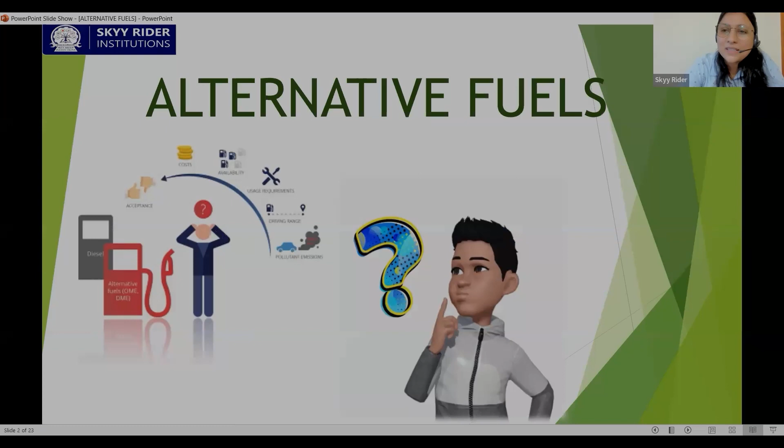So before moving forward, let's first know what are alternative fuels. So alternative fuel is, whatever fossil fuels we have, those are the conventional fuels which have been in the market for hundreds of years, and we are extracting them from refineries, from oil wells, from the seabed.

But nowadays we want something else, and this something else is alternative fuel actually. They are equal in energy density. We can say that they are big competitors of fossil fuels, and the most important thing is that they are never going to vanish away. They are renewable energy resources.

We all know that if we talk about oil reserves, generally the Gulf countries have a monopoly of it. So they are all going to, one day or the other, vanish away or be completely used. So we have to think of something else. We have to think for saving our environment.

We can just go for something which shouldn't be imported from anywhere else. We can extract it from within India, made in India, produce it and have reasonable prices, and give it to our consumers. So we can say it is a non-conventional and advanced fuel, derived from resources other than fossil fuels, from sugar cane, from maize, from barley.

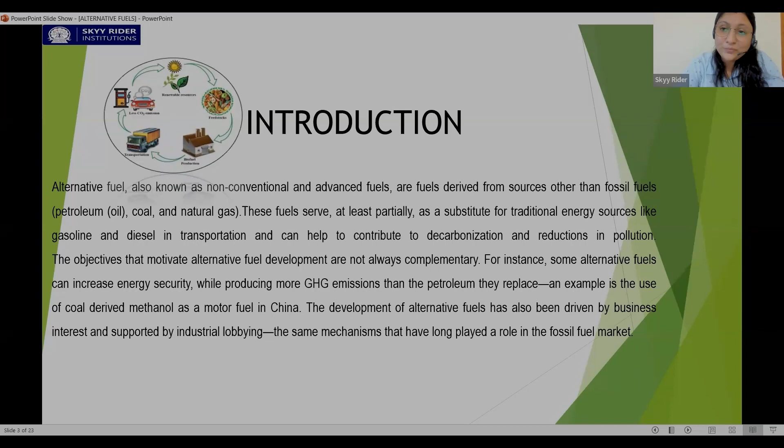So the question arises, as I told you before, is there a need for alternative fuel? Like we are going along fine, everything is going well, we are all living, breathing, and fine. So what is the need?

So the first and most important need is that conventional fuels are very limited. As I said, most of the Gulf countries have a monopoly in that, and the entire globe has to purchase it from them. So a huge amount of our money is going into their hands. We are importing, and the prices rise, and we all have to afford it. We have no other option.

Also, nowadays they are here on this earth and no one knows when they are going to vanish away. So the most important reason why we are turning away from conventional fuel like oil and petroleum is that they'll eventually run out, and they are non-renewable. We all know that. If they are going to just dry up today, we are not going to get it tomorrow, because it took millions of years to be formed.

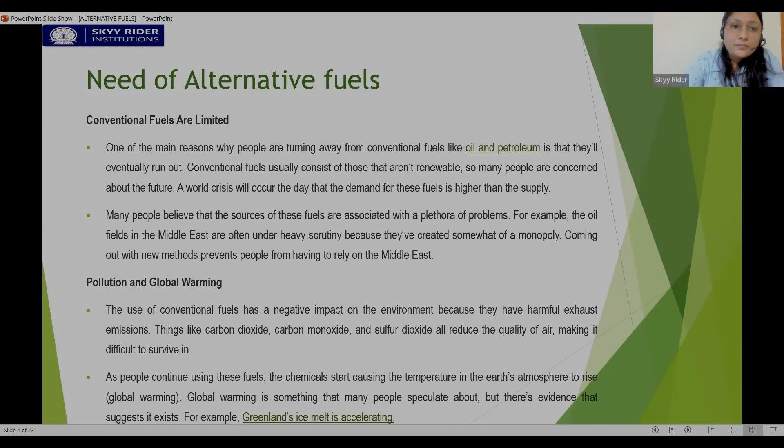So there is a serious need of thinking about alternative fuel. Now the next question is, okay, we know that there is a need, correct? Again, what should be the criteria for having these alternative fuels? So we will have a short discussion on this.

The first one is resource base and energy density, right? So firstly, there should be availability. As we do not have any infrastructure from decades, something like that, we have to build some infrastructure for that. We should have a proper source of raw materials, and a proper factory where we can extract these alternative fuels. So we should have a proper base, and whatever we are extracting from them should also be in competition with those fossil fuels.

If I say that we are getting some amount of energy from gasoline which is more than that of the alternative fuel, then none of the customers are going to opt for alternative fuels, right? Because they want their vehicle to drive at a certain speed, and they should have these kinds of facilities.

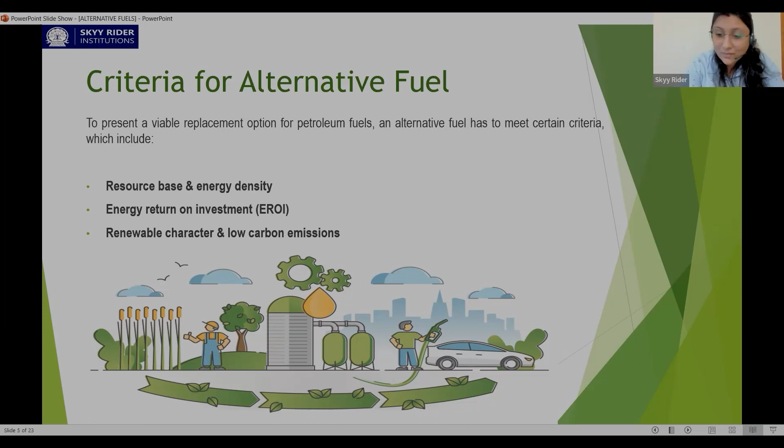So we have talked about the criteria which we have to fulfill before opting for any alternative fuel. We have to think about whether we have a proper amount of arrangement or not. We have to think whether it is economically feasible for us, and we have to think whether it is renewable in character or not. We have to think whether we can get it from waste materials also.

So the next question is, there should be some standard specifications before we opt for the alternative fuel. We have to run our engine, so specifications must be there before opting for anything. We have come from a background where we get lots of energy, where we can drive very effortlessly, and we never give it a second thought, right? So we have to set some standard specifications before opting for anything like that. Before opting for any alternative fuel, before giving it to consumers, we have to test it. So the first thing is that the engine performance should not be compromised.

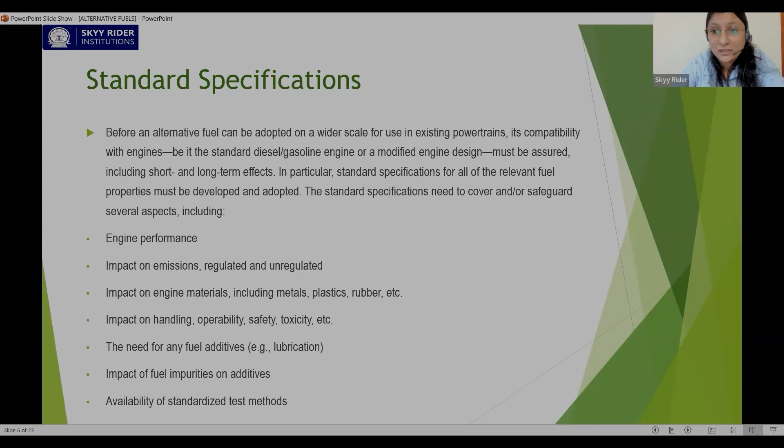So we have learned about that. We have standard specifications and what are the criteria, what is the need, we all know that. Now the next is your types of alternative fuels. As I told you, in this lecture I have taken lots of names in speed. These names are hydrogen, LPG, ethanol, correct? So I'll just explain it one by one.

Okay, so first one is propane. Do we just wait for a second? Okay.

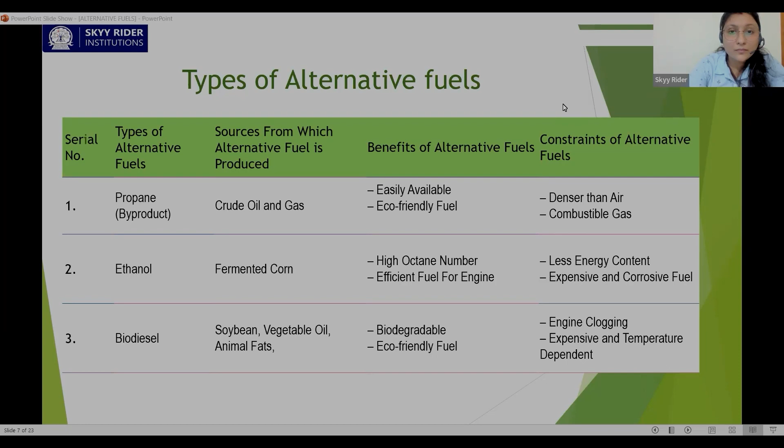Next is electric batteries. We all are living in the era where EVs are very famous these days. We have an electrolyte in which the positive and negative electrodes are there, and the reaction takes place, and we get energy - very clean energy, no wastage. We can say there are no hydrocarbons in the environment, so it is very eco-friendly, with easy service available.

We don't have to go for the regular maintenance of cleaning, decarbonization, and polishing. We don't have to check for sticky valves or misfiring taking place. These type of problems don't appear in EVs.

So what is the problem? The disadvantage - we require proper infrastructure first of all. We should have proper charging stations, place to place, just like we have fuel stations these days. From decades we have had a set infrastructure for our conventional fuels, but for alternative fuels we have to establish that, and that is very important. We have to move smoothly in that direction.

Second is shorter range - we have to charge it time to time. Few giant companies have launched vehicles which can go far, but R&D is working on it, and there's a very high hope for coming eras of EVs only.

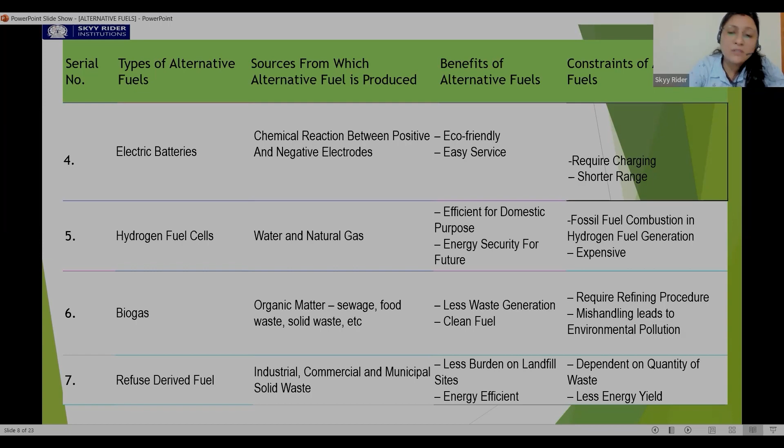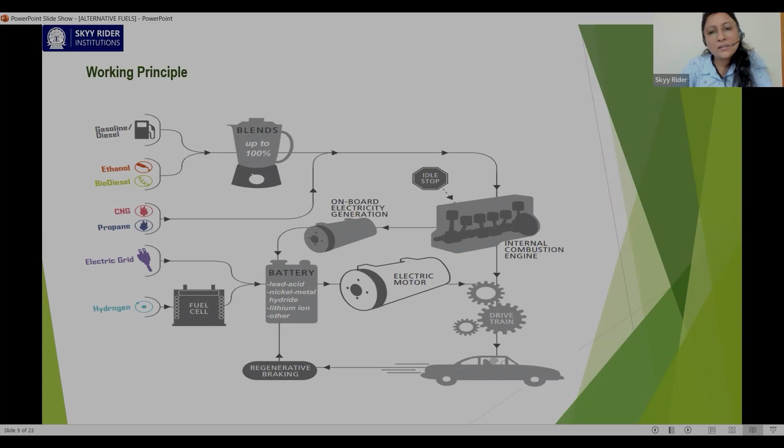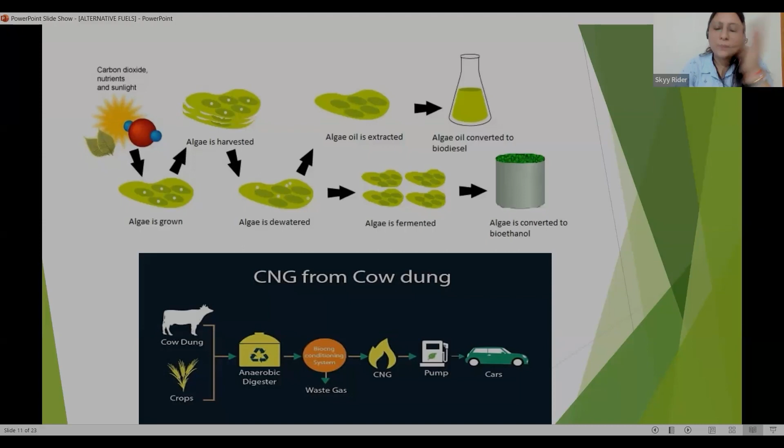So the next question is, why are alternative fuels preferred? We are preferring them because they have less cost.

Generally they cost less than conventional fuels, because we are making it in our own country. We have proper resources for harvesting it and extracting it.

And less waste is produced. Particulate matters are not there, carbon monoxide is not there, unburned hydrocarbons too, it produces less. We cannot say it is not there, but the production is less.

Next thing is that if we have proper alternative fuel plants, then we can generate lots of jobs. There's a survey in USA that after just opting for alternative fuels, they had millions of jobs because of this, because they had set up a factory, they had contacted the farmers and all, and they had a proper setup.

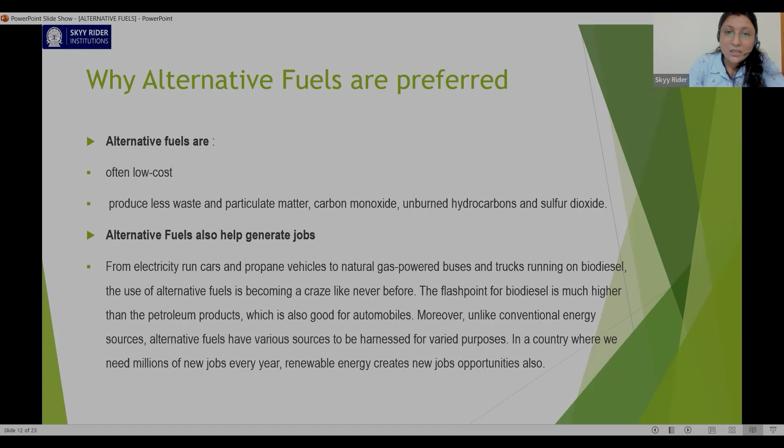Next is phasing out vehicles running on conventional fuels. As I said, if I talk about India, in 2025 we'll have E20 vehicles. But if I talk about Brazil, they are opting for E100. So you can say that the dependency on conventional fuels is nothing in their country, like nobody's people are driving that. I'm not saying they are not using it, but they have other options.

So we don't have to face that financial and environmental repercussions also, because we are going to extract in our own nation. We have the 'Made in Bharat' thing, something like that.

So next is green hydrogen fuel electric vehicle. As I said, hydrogen is the cleanest fuel amongst all, and it provides lots of energy which is produced, equivalent with that of your conventional fuels. There is no compromise in the energy.

So it's a zero emission thing, right? So it's best for the environment, best for our health and all. So why shouldn't we opt for it? There's no reason for not opting it.

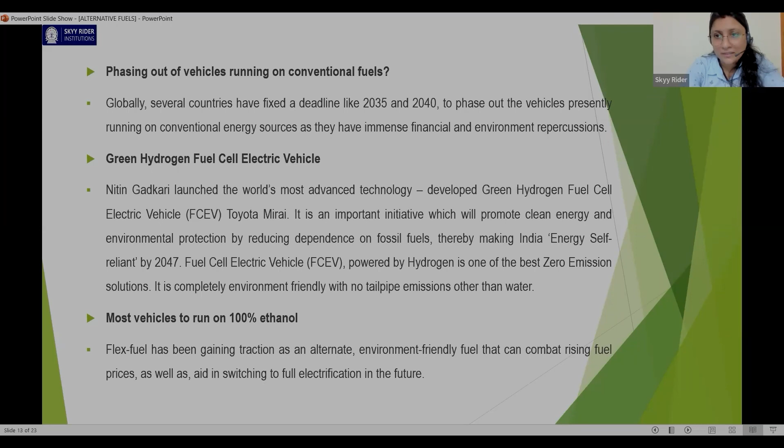This is the fuel ethanol production data, in which we have 27 billion gallons in 2021, and US is the largest producer of ethanol. So they are producing it, and we are somewhere using 3%, we are producing 3% ethanol. As per the government of India, we are working on it and increasing our production also in coming years.

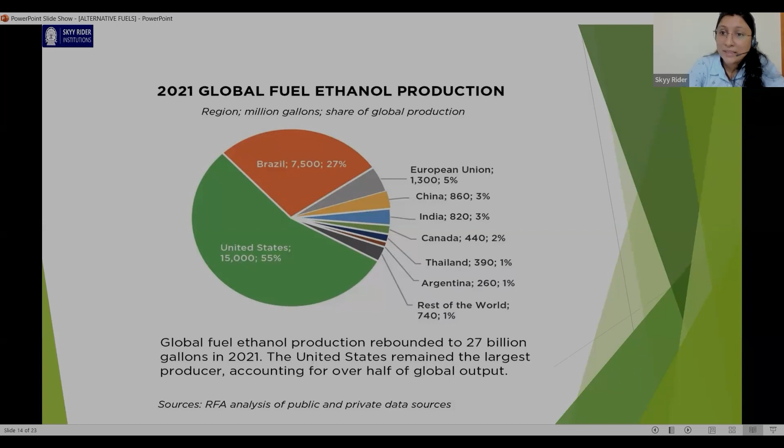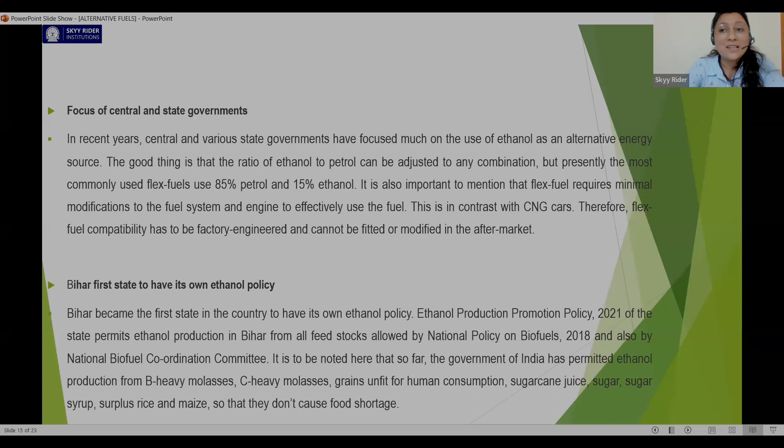Next thing is, nowadays central and state governments are focusing on that. As I said before, only from E10 we are moving to E20, and it is all because of the state and central government only that they are opting for it. Next, Bihar is the first state to have its own ethanol policy. It is good that some states have taken the initiative to start this policy for ethanol and to go towards clean fuel.

Now the next thing is, what are the major challenges? Of course, everything comes with challenges, nothing is ideal, right? So the first thing is food versus fuel.

If we are going to use everything, if the farmer comes to know that this is a very profitable business, they will go for commercial farming, and they are going to go for these types of crops only, which is going to benefit them in monetary terms. So there will be a shortage of food, as USA had already faced a high rise in demand for corn for the production of ethanol, so the prices, people not getting normal corn in the malls and all.

The price was really high because there was high demand for the production of ethanol. So the farmers were using it for that, they were driven by profit and all. So this is a very very crucial topic to discuss.

Next is the relative cost, convenience, and availability of the alternative fuel compared to traditional petroleum-based internal combustion technology. As I said before, it should be cost effective, but currently it is not, because we don't have the proper infrastructure for that.

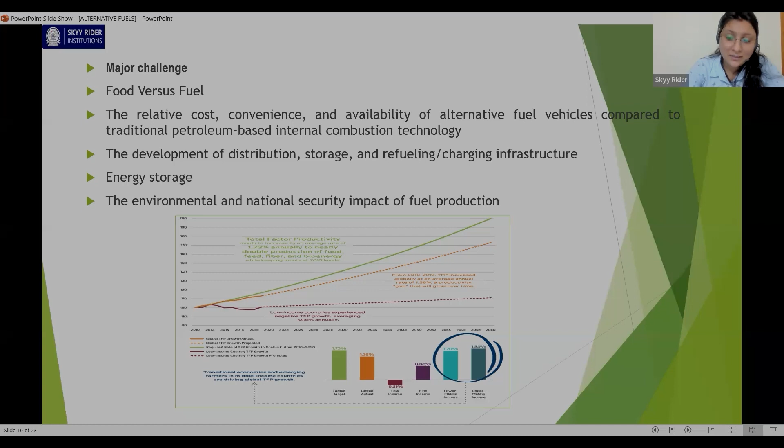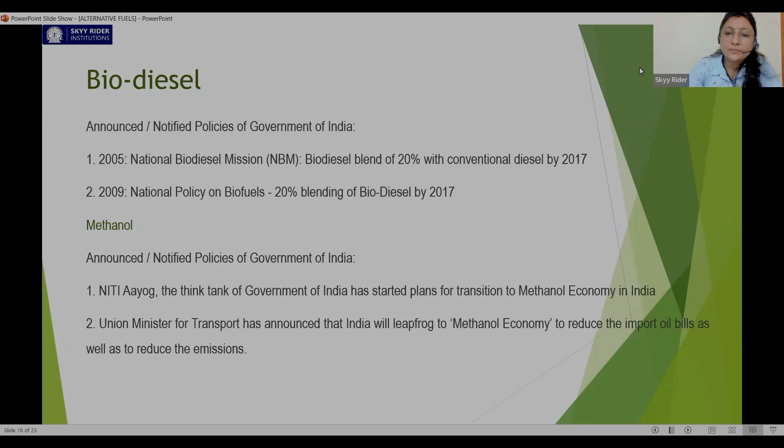See, it is for the biodiesel, the policies of Government of India for biodiesel. I hope you all have read.

So what's the future scope? The last one - the future scope is a bright future of alternative fuels, I can say that, because R&D is working really very hard to conquer this field of alternative fuels. They are continuously working with ethanol, with methanol, with CNG, and with hydrogen. They are working really very hard, as in India we are moving from 10 to 20.

US is moving from 85 to 100. Brazil is already 100% ethanol. So the entire globe is working on it. We have a very bright future of having this ethanol in our fuel list.

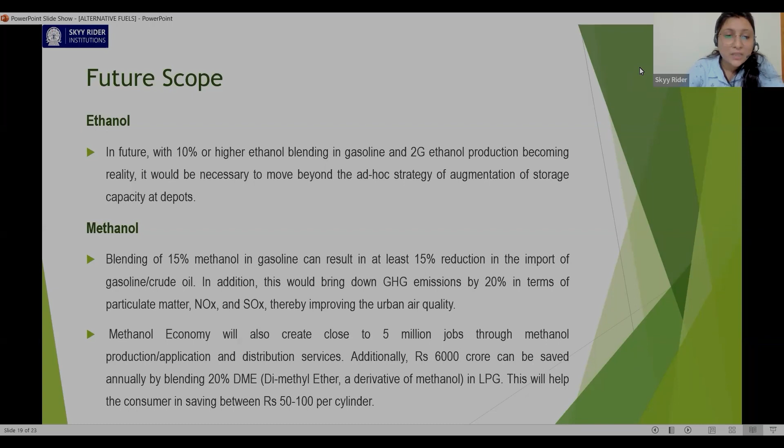And if I talk about methanol also, it reduces 20% of the emissions of particulate matter, NOx and SOx, so it will improve the air quality. We'll also use methanol one day, because in India, if I talk about other nations, they go for it. We also have hydrogen these days, the cleanest fuel, and it is going to drastically change the environment in a positive manner.

And if I talk about bio-CNG, it is from cow dung or from organic matters, we get it from crops also. So it will definitely have a very bright future, and it can be delivered, we can get it from normal CNG stations also. So yes, we have a proper resource of it - we have crops, we have animals in our country, so we can go for it easily.

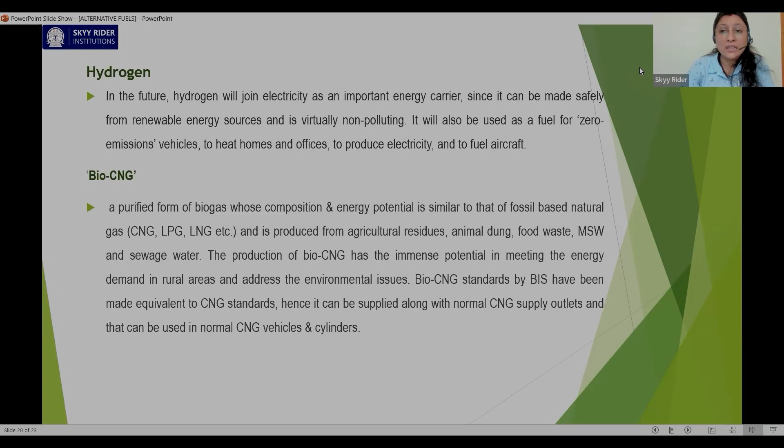Bio-CNG standards by the Bureau of Indian Standards have been made equivalent to CNG standards, so we can go for the normal CNG supply outlets, and we can fill it in our normal CNG cylinders. So it's a huge victory, I guess.

And if I talk about dimethyl ether, it has a very high cetane number, and we can use it in our diesel vehicles very easily. So again, this blending will reduce the NOx, SOx, and particulate matters.

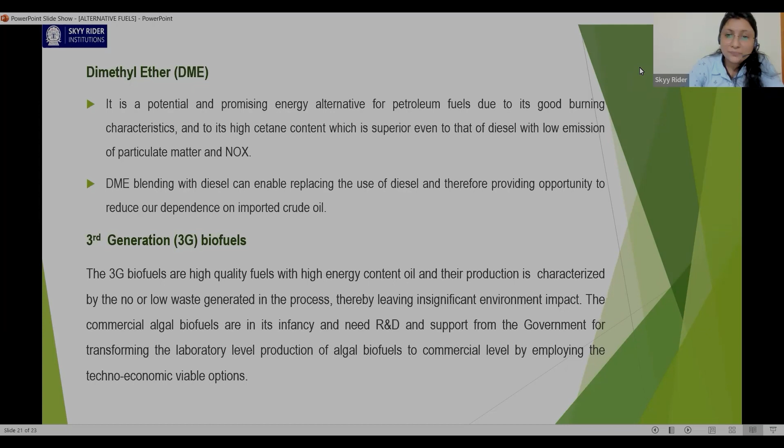We have third generation fuels. The third generation fuels are based on algae, which I told you before. This has a very great future because we can extract energy, and it will give us very clean emissions, which is not going to impact the environment in that manner. So we have dealt with all the alternative fuels.